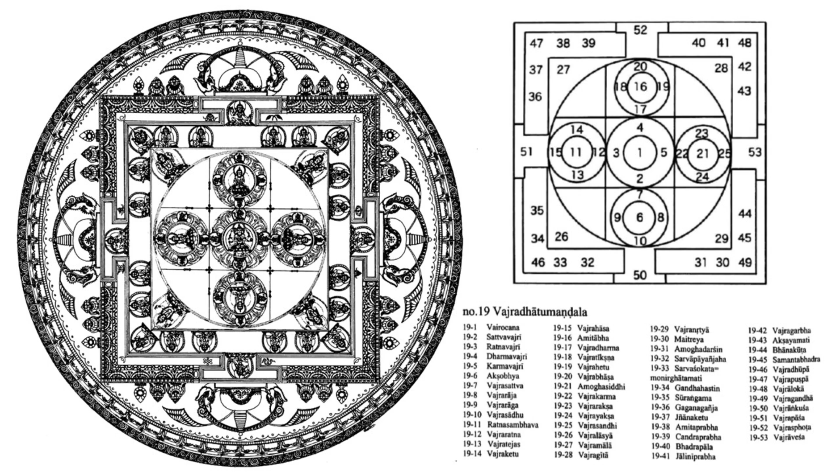Just like to show, this is the Vajra Dhatu Mandala. Actually, this mandala is transformed to that square mandala, and how it was done skillfully is interesting. Schematically, this is the Vajra Dhatu Mandala. These 5 circles are headed by Panchabuddha and surrounded by bodhisattvas. So this was transformed this way.

So this white part is the Mahavairocana Mandala, and then this green part, these 4 deities were laid in this linear format, and the central Buddha is hidden here. So you will not find the Buddha in this square mandala. So that is how it is transformed, and the surrounding part is the 16 bodhisattva circle, and all the corners are with puja devata, so devis.

So it is interesting that this kind of mandala is transformed to the square form, and this square form is necessary because we are not making the circular plan of the Vihara. In other regions of the world, there might be circular buildings, but we are building square structures. So for that purpose, they transform it into square format, and this is the basic grid. Within that, they start to work out the building forms.

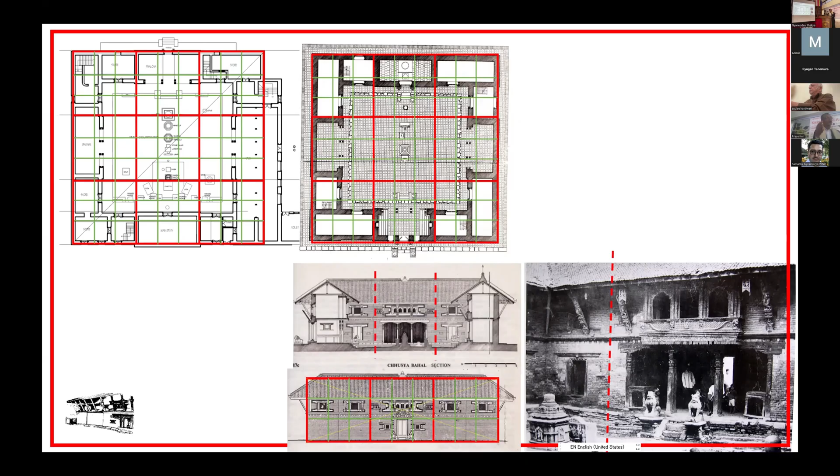It gives a mandala, like it indicates the mandala lines.

Next chapter is about Istika Lakshana, about bricks, and it gives the proportion: length-breadth proportion and thickness-breadth proportion. And it was interesting, we have several data from Kasthamandap, Jayabageshwari temple, Amshuvarma brick, Charumati Stupa, Brahma temple, and we have this Maapa.

Maapa is what we are currently using for the construction of Vihara. And the interesting thing is, when we check with this proportion, local Maapa came very near. It's very near, and Charumati Stupa is also near, but local Maapa is very near.

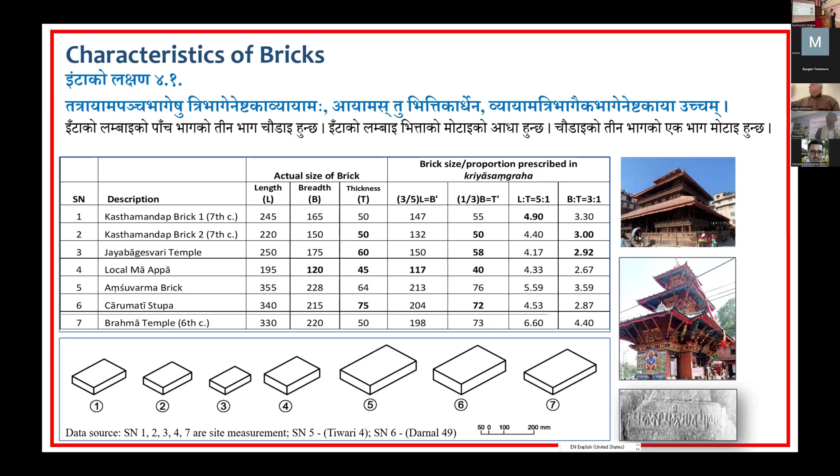The next section is about Digrahana. Digrahana is how to precisely define the direction, how we say east, north, west, south. So it gives a detailed instruction about that.

And then this is Prasada Lakshana. Prasada Lakshana, in this slide, is a general type of definition. But in the next, why I put this question mark is that some of it is too general, so we couldn't relate it to our context. That's why we just left it for the future.

And then there is another heading, to lay out the drain. Now we have this grid, and we have assigned deities for the grid. When it refers to a location, it just says Mahakala. Mahakala square means that location. Mahadeepa means that location. So it suggests Mahakala, Mahadeepa square, and it should go towards north.

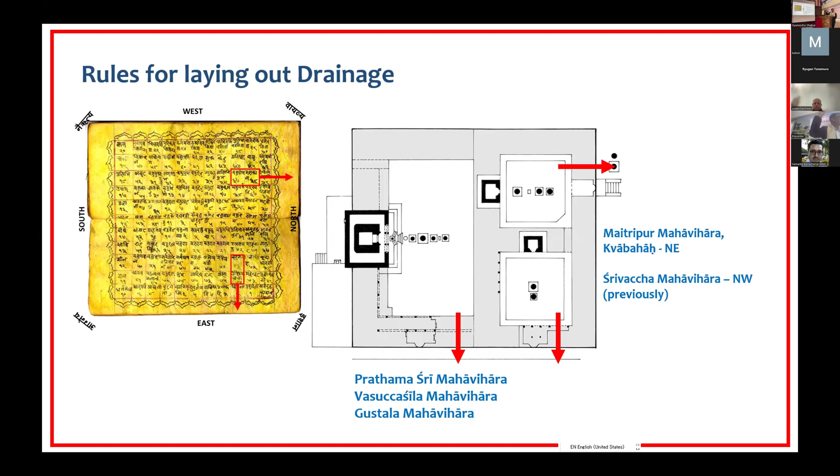And it gives two options, only two, not a third. Vajra Gandha and Usnisa Chakra, and the drain should go towards east. So this is very interesting, and we checked with our existing Bahāḥs. This is from Guita, where I myself belong, and there are 3 Viharas adjoining at the same place, and they have put the drain at the same place that Kriyāsaṃgraha has prescribed.

So the next section is Prasada Lakshana, and it gives different typologies: Ekasala, Dvisala, Trisala, and Chatusala. So a Vihara could be a single building, 2 buildings, 3 buildings, or 4 buildings. For Ekasala, it prescribes that if it is in the west, not good. If it is in the Uttara, not good. If it is Purva, not good. If it is in the Dakshina, south, and facing north, this is the auspicious one.

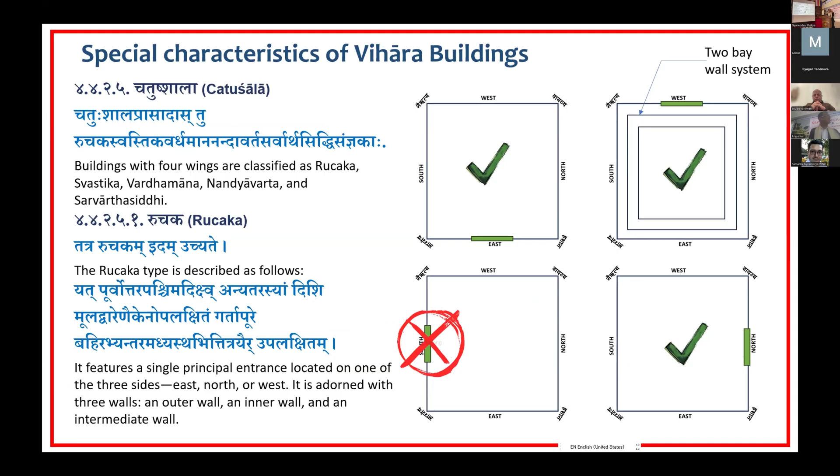The next is Chatusala. This is the most popular writing. And in the first section, it says putting the main door at the south is not good. You can put the door on the other three sides, but south is not good. So we checked this, and this has been maintained.

And then it lists down five kinds of Chatusala. One is Ruchaka, another is Swastika, another is Vardhamana, Nandyavarta, and the last one is Sarvarthasiddhi. And of these five, in Vihara form, we find two forms are much used. So Ruchaka is very much conforming, very much aligned with Bahāḥ architecture.

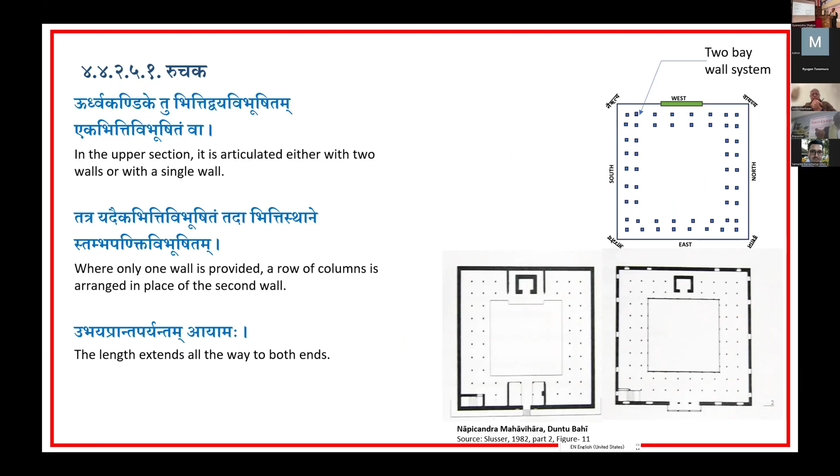It talks about rows of columns. It says it should be two bays, and if the wall has to be removed, you need to put rows, a series of columns. So it is well instructed here, and it gives the dimension proportion, like the length-breadth proportion and the position of the middle row.

And I thought many of the Bahāḥ now reconstructed tried to put the column at the center, but actually Kriyāsaṃgraha does not recommend that, and it has a reason. If you put it at the center, there are some kinds of inconveniences. So I won't go into that detail, but if you see that, you can understand. So it has clearly said the middle ones should be...

It gives the ratio. The first one is L by B, length and breadth. So it should be 5. And we checked with several cases. Actually, we didn't measure that. Mohan Murthy Panta, Dr. Panta, has done it in his book. So we just took those data and compared them. They are almost, you can say, exact. So 5.2, it should be 5 actually, but 5.2, 5.5, only very small deviations.

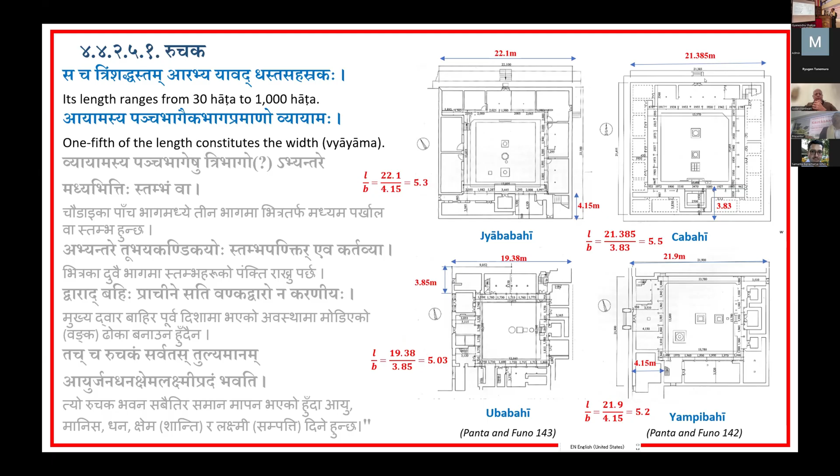And the next criterion is the middle wall. The middle wall should be 3 by 5 of the total width. So this is the criterion given in Kriyāsaṃgraha, and we checked with several Bahāḥ. This is Cabahi. So if you see this dimension, this is width 3.83. It should be 2.38 actually, as per site measurement, but by calculation it came to 2.29. So it is very near. And interesting is the middle wall is not at the center.

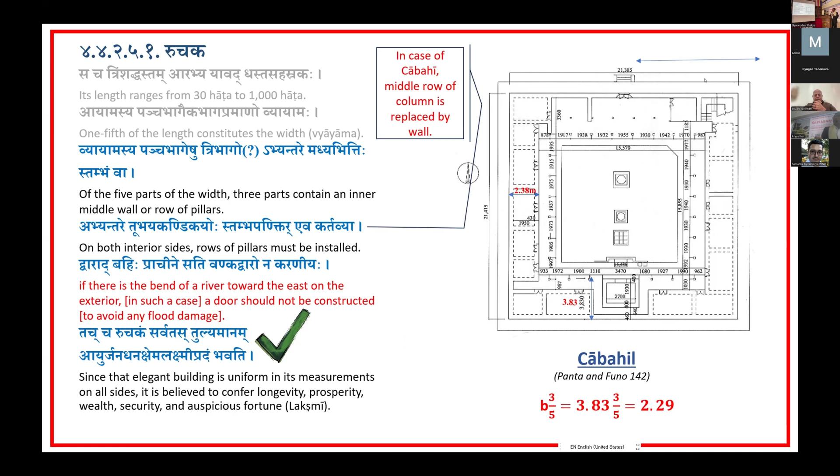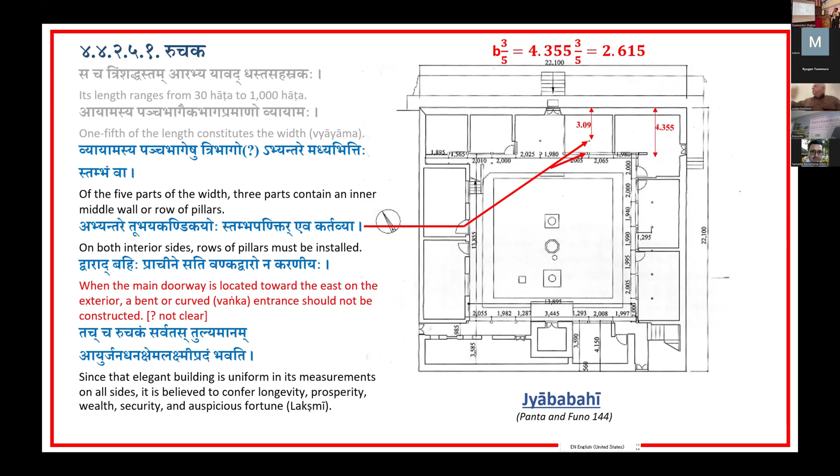This is Jyābabahī. This was recently reconstructed, but this picture is from before reconstruction, and during the previous reconstruction they modified a lot, but still some remnants of this row of columns remain from the past, and this is also positioned... it is 2.6. Here it is 3.09. So it has some deviation. So this is Ruchaka. The next is Swastika.

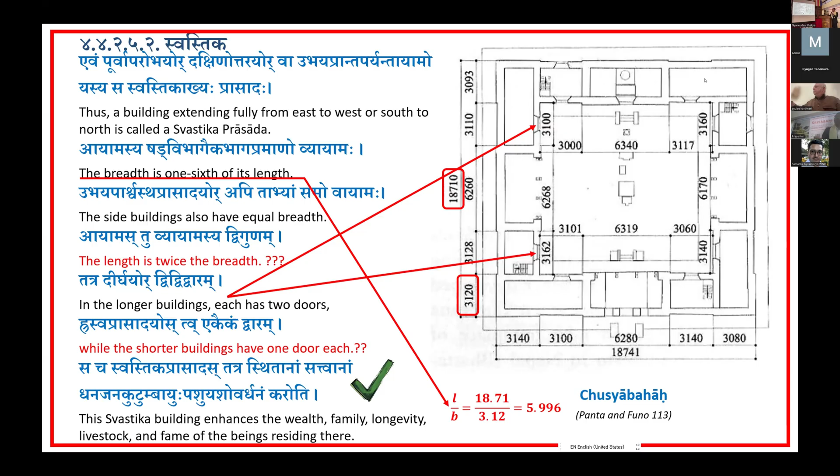Most of the Bahāḥ are constructed in Swastika format. It recommends a single bay with rooms, and it also recommends the length-breadth proportion, that is 1:6. And we checked with Chusyābahāḥ and many Bahāḥs, and they are in 1:6. So this is from Chusyābahāḥ, 5.996, which is almost close. And it says this type of swastika form is very auspicious. It recommends it.

And then Vardhaman is next, for which we didn't find this kind of case. It does not explain much about the proportion. We can assume the proportion could be that of swastika or ruchaka, but it only mentions two water sources or water elements, a water spout, and the south wall. I think we don't have this kind of vihara with a water spout.

And there is another, Nandika Varta and Nanda Varta, and it says Chanayutasa. Chanayuta, this word is a bit tricky. We are still trying to interpret it. And we have manuscripts with these pictures.

One picture is with some projection towards the corners, and another picture is with this long room extended beyond this to the edge of the building, and the format is like Nandavarta. The Nandavarta also implies this kind of format. So

this format we can see in Chusyābahāḥ, but interesting is that Pinchebaha, which I showed the inscription, does not have this format. All the other features are complying, but this Nandika Avarta we can't find in that particular vihara. So we can figure out that Nanda Avarta is one of the features in the swastika form.

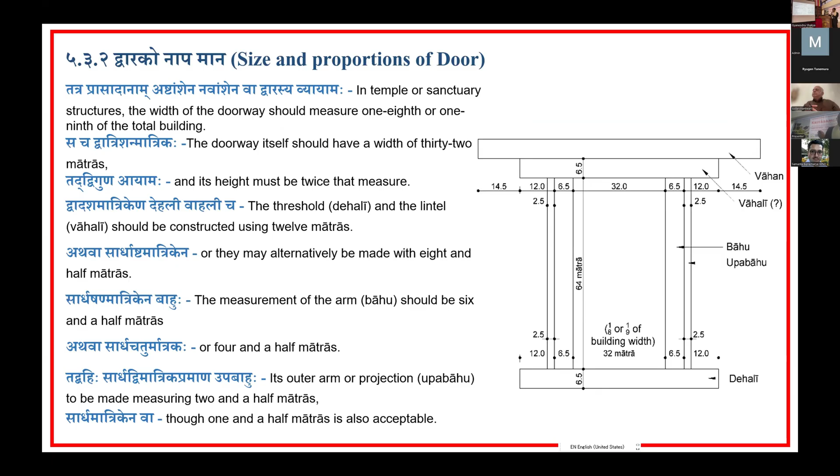It gives all the proportioning, and it says matra, and this was drawn as per its prescription, and it resembles a lot what we have as doors in our vihara. We haven't really checked with the doors, but it resembles. Some of the features are really conforming, but not all the features are coinciding. And it says about Torana.

Torana should be with Vajra, Ratna, Padma, Chakra, Deva, Naga, Yaksha, Vidyadharadi, Nana, Lankara, Torana, Dikam, Yatha, Sobhanam. So it says many different things, but in our Torana we can see lots of Nagas. This is from Chusyābahāḥ. You can see all these Nagas. So this feature, we can relate that it comes from the Kriyāsaṃgraha prescription. And Vajra, Ratna, Padma, Chakra actually are symbols of the Panchabuddha.

And we see in some temples a miniature Torana. They have miniature Toranas. They have used this. It is also in Chusyābahāḥ and also in Bhubaha. They have only the symbols of the Panchabuddha without other features. So maybe all those types of torana come from this prescription.

And then stamba lakshana. Stamba lakshana gives the different parts of the stamba and their measurement in proportion. It's matra. Matra is a unit. And we compared it with this, which is also a drawing from Professor Murthy. And coincidentally, this was drawn from Guitabahi again.

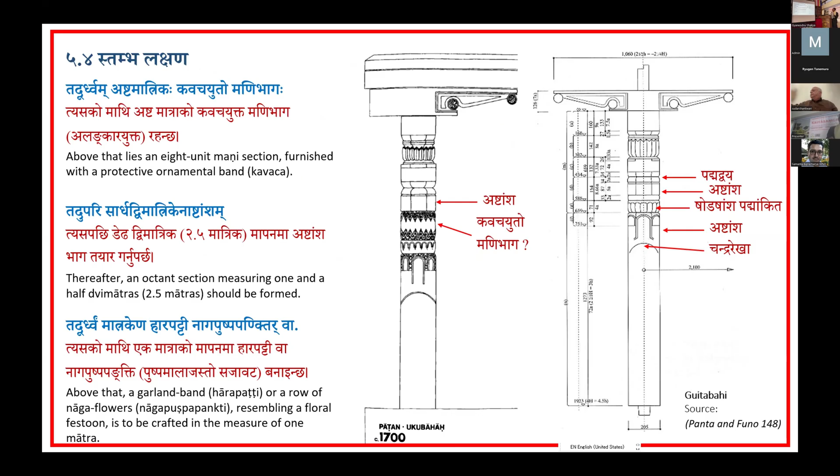And it says Chandra Rekha at the middle of the column. So this is Chandra Rekha, Astamsa means octagonal portion, Shodasamsa means 16 divisions of the circle, then again Astamsa, Padma Dvaya means pair of lotus, Chaturasra is the square portion, and Astamsa Vartulakar is circular. So it gives all the parts and matra. And it gives what should be above the column.

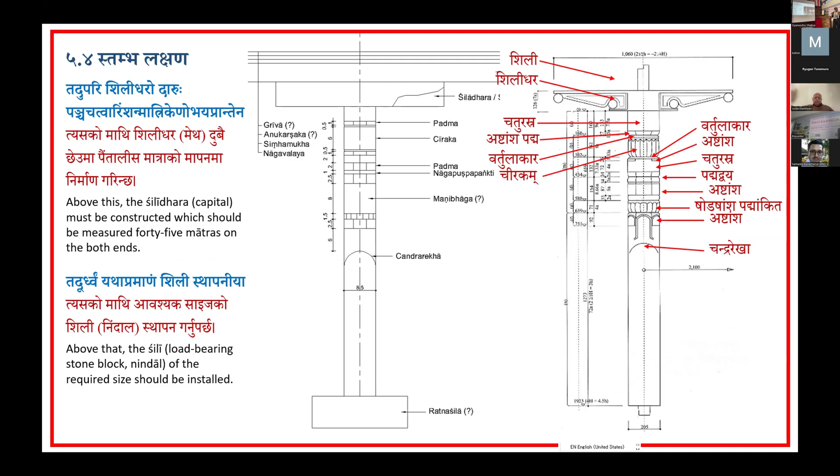So this is the picture. This is not the real one. This is what is written in the Kriyāsaṃgraha, and this is the real one at the site. So we can compare. It resembles very much, but not exactly. And this is from Ibabahi. We can see this Chandra Rekha, this octagonal portion. The matra is different, but still the features are the same.

This is from Guitabahi, recently constructed, recently installed. We don't see these features. So it shows that in the current reconstruction, they are forgetting these norms, which have still been in use.

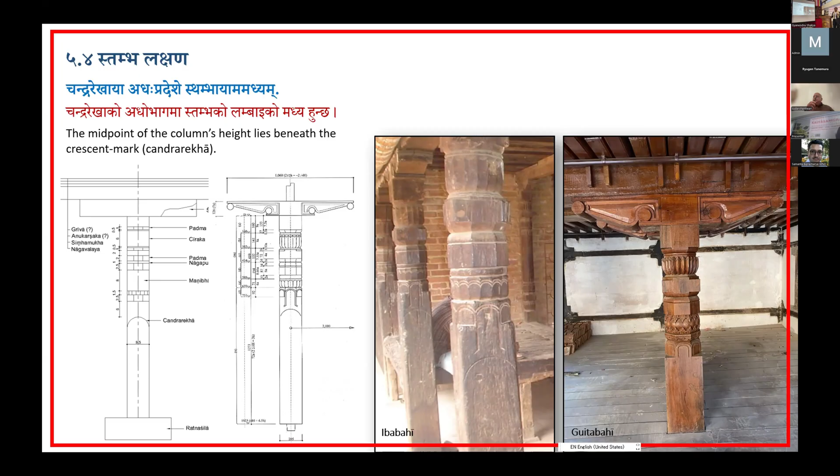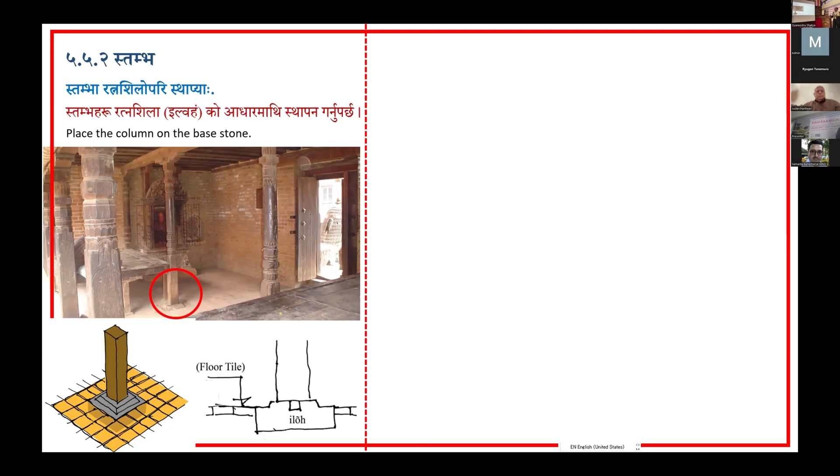And then another section is a very short section. It just has a single line. It says Stamba Ratna Silo Paristapya. The column should be installed over the base stone. We call it Iloh. And we can find in all the bihars, the columns are installed over the base stone. So this is the schematic drawing. And in the current reconstruction, this has been discontinued, as Lata already mentioned.

When this was being implemented, we complained, we had lots of debate, but it was not heard, and it was implemented. And the sad part is, this is included in the building code. That means it's like a legal norm. And we have been talking with the DUDBC and government officials about this, but it is not heard. And it has a big problem.

The issue is like with this Kasta Mandapa. When Kasta Mandapa was in renovation, they raised the floor covering the Iloh, and that made the wood timber get rotten because of the moisture.

When this fell down, it was found that it had a void because of rotten wood. So one of the reasons that Kasta Mandap fell is because of ignoring this Ratna Silopari.

It is actually well written in the Kriyāsaṃgraha. This is wrong practice we are saying, and DUDBC, the government building code, has been implementing it. And there is symbolism with all these dharma words.

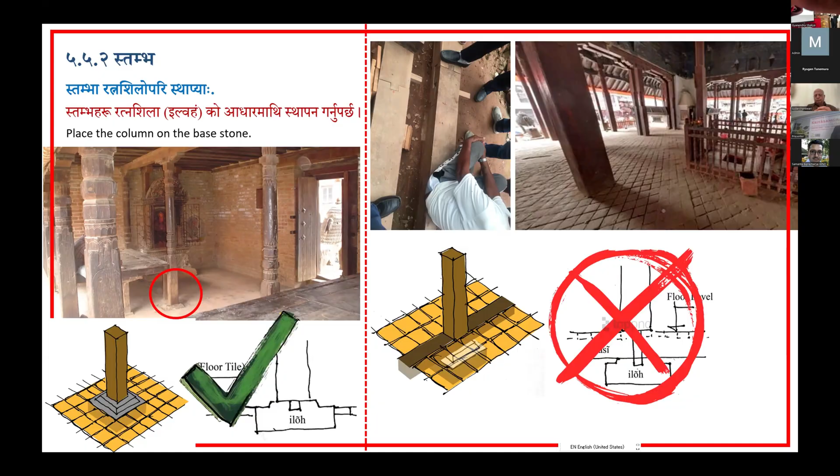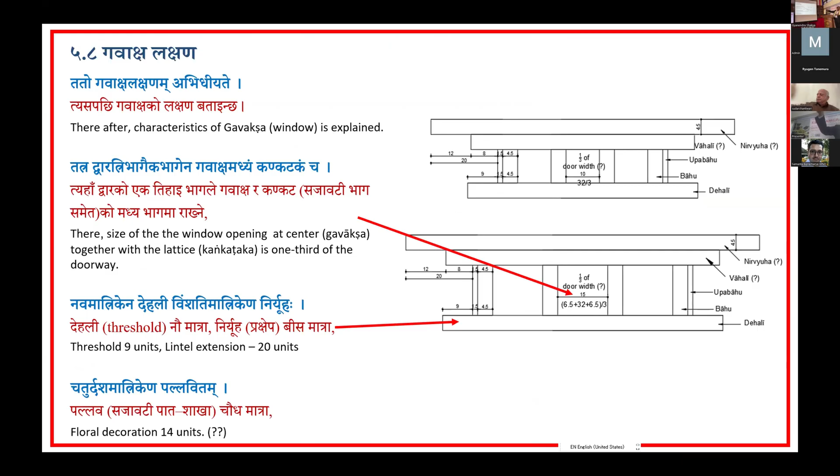And there is another section, Gavaksha Lakshana, about the window, and it also gives the proportion. We tried, this is the drawing made according to Kriyāsaṃgraha. It also resembles a lot what we have as Gavaksha, and it gives the parts, names of the parts like Bahu, Upabahu, Vahali, Nirvyuha, Dehali.

So these all are words from Kriyāsaṃgraha. Currently, we don't much use these words. I remember only one, Bahāḥ. We call it Dutu Bahāḥ. We call the vertical member Bahāḥ. Only that word is still in use. Other words we don't use.

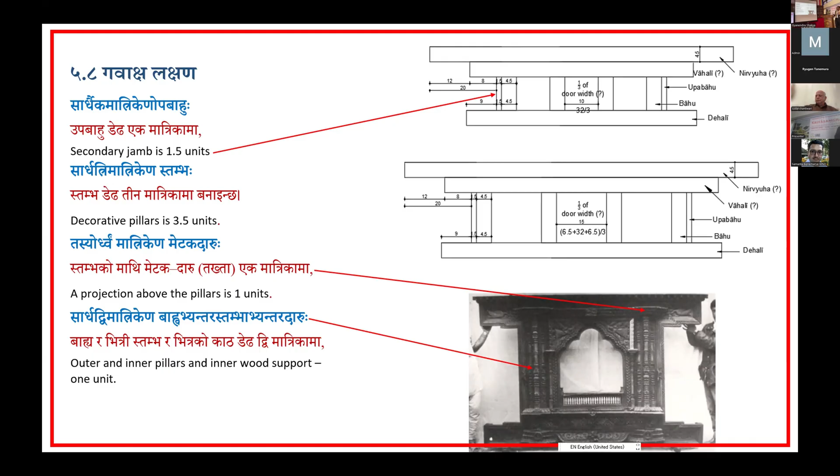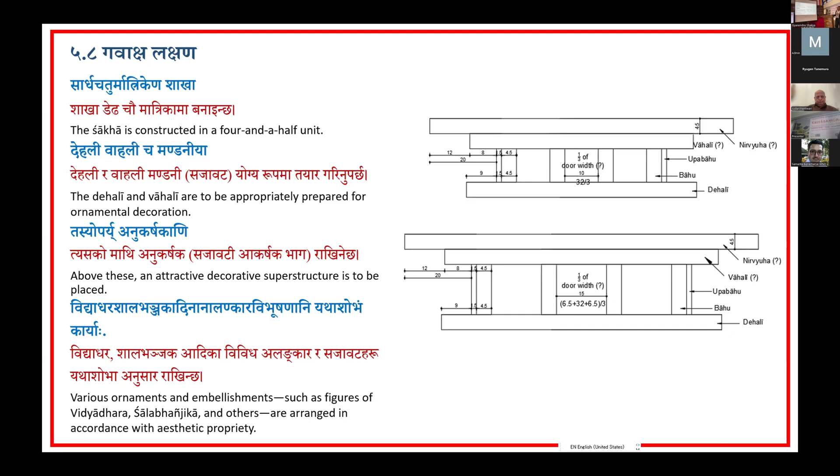And then it says it should be decorated with different alankars. I'm not going to go in detail. And it recommends Gavaksha could be 3, Pancha, and Saptaksha.

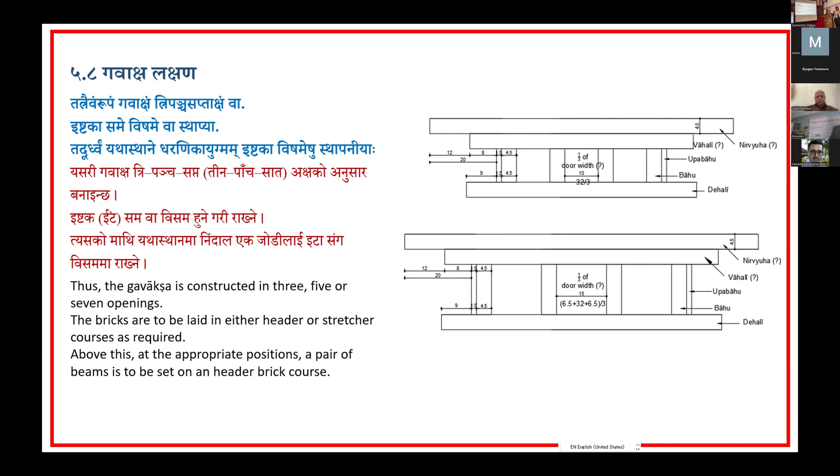Aksha means Iksha. Iksha means like eye, right? So it could be 3 openings, it could be 5 openings, and it could be 7 openings. And we see lots of cases with 3 openings and 5 openings.

In the next section, it gives, if that is 3 openings, it is a symbol of sunyata, animitta, and apranihita. If it is 5 openings, it is the 5 kinds of jnana. And if it is 7 openings, it's the 7 bodhyanga. We don't have cases of 7 openings. Still, I haven't noticed that. If there is, please inform us.

And then after that, we have this laying of the roof with joists. Shirodaru is we call Thaima. Thaima is the ridge beam. And Istuna are those ridge pillars. Griyachhadana Daru is rafters. So it gives the different measurements, but still we couldn't relate it with our cases.

Sikha Daru, still we can't relate it. And another, this is the last section. It talks about Chitra Karma.

Painting should be done, and it says Netra Yugala Kalasa Yugala. We don't actually have this in Bihara, but in private houses, when we do Janku, we write Netra Yugala Kalasa. So this came from Kriyāsaṃgraha.